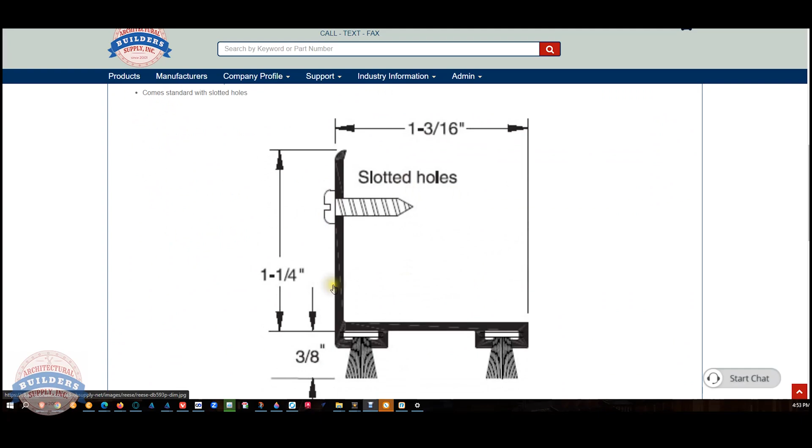Extended description information, profile of what it looks like. This is the installation instructions. It basically means measure twice and cut once. What you're going to have to do, depending on where you install it, if it's an in-swing or out-swing, you may have to notch the face of the unit.

Let's take a look at some photographs that we have of it. That's a blurry cross-section. Notching the face of the unit, if this was coming in contact with the stops on the frame, you might have to cut that back a little bit.

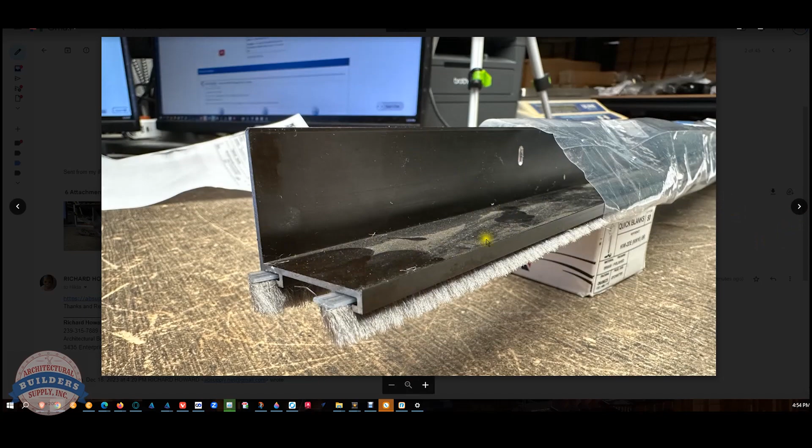Nice image showing their dark bronze. It's a warmer, lighter dark bronze than you'll see from other manufacturers. So if you're actually matching an oil rubbed bronze like a 613 finish on hardware, Reese would be what you'd want. Showing the other side, obviously some dust on that extrusion from the factory.

Showing the two pieces of pile. Now what I would do is, once I got it installed, I might punch that and crimp that slightly just to keep the insert from sliding.

I've had customers call and say, oh, it's damaged. Well, where's it damaged? Well, on the bottom. I says, do you ever see it? No. I says, do you know why it looks damaged? It's because it's been crimped or peened. Otherwise your insert's going to slide.

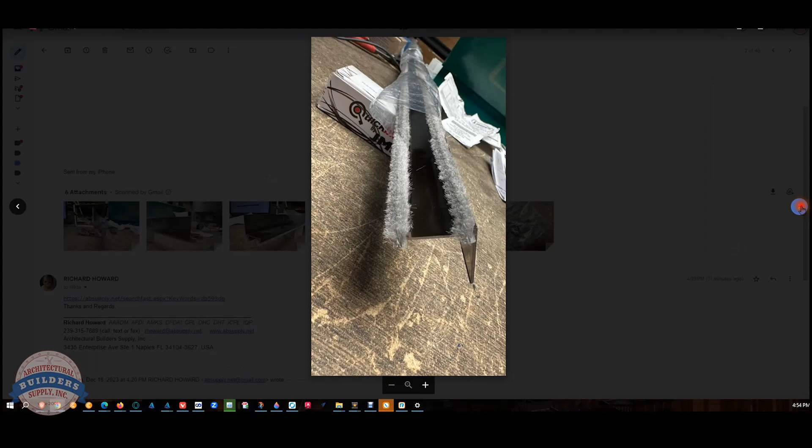The underside showing what the two rows of pile look like, and then a little better view on that. When you're replacing this material, it's the width of the rigid backer and then the projection of the pile.

Now, there is a link here to the manufacturer's page on our site where you can pull up not only all of the Reese products that we sell by means of just scrolling. There's many thousands of Reese products.

A really good way to navigate if you're not sure is just to fire up the product catalog, and we can do that here. Control F, find function for DB593, and we're going to get there.

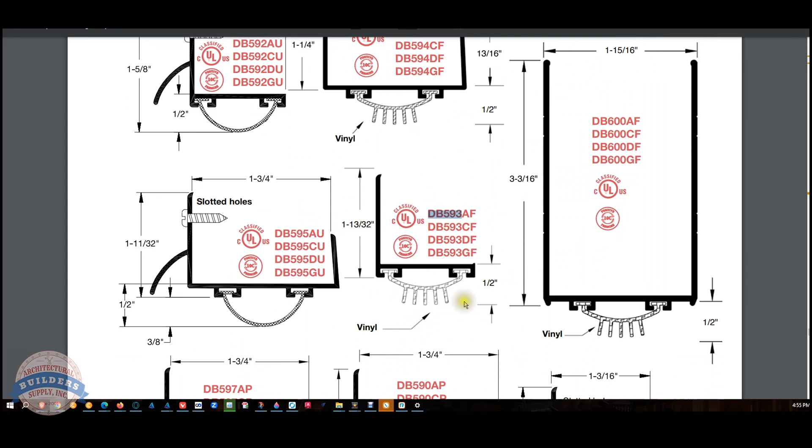Now, you see a DB593AF. This is where the customer started. Half inch, no good. Vinyl, not great to be smooth over a polished floor, which is actually what it was. But let's keep searching.

Aha, DB593 with a P. P means pile. That V, or the F, actually means vinyl that has a finger profile to it rather than smooth. This is actually not vinyl anyway.

But we can get here to see our DB593s. A, C, D, G: mill aluminum, clear anodized aluminum, dark bronze aluminum, gold anodized aluminum. And there you go. Oh, it's right here.

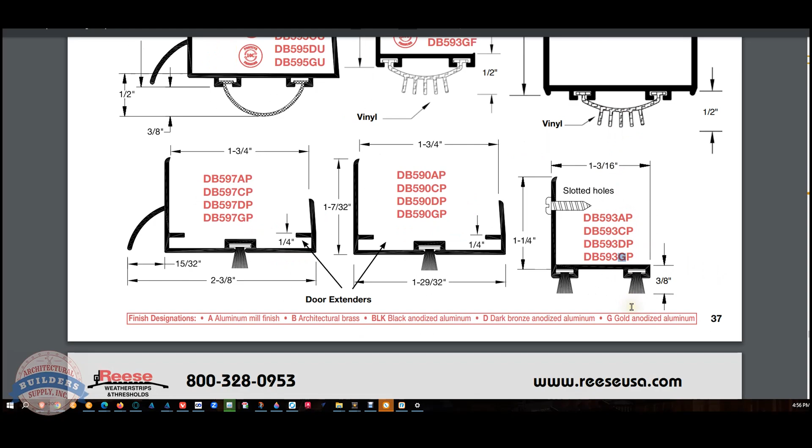Forgive me. The rest of this catalog is really nice because you'll be able to view all of the door bottom solutions from Reese. And one really nice thing to know about them is that they champion the use of polyurethane. Polyurethane is exceptionally robust when it comes to tear resistance, abrasion resistance, unaffected by ultraviolet.

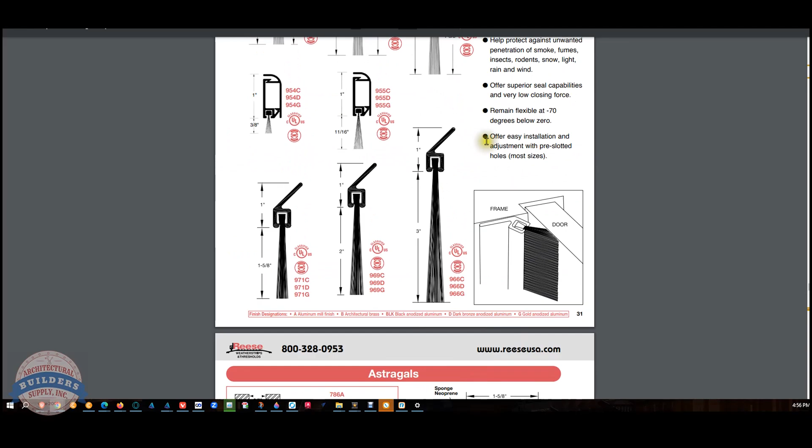So if you're looking for a product that is the most durable in many instances, like a food processing plant where mildew and fungus will not grow on it, you're going to want Reese. You're going to want their polyurethane. Abrasion resistance is off the charts.

And here's polyurethane. Let's wrap up this video on camera.

Let's move on to the rest of the video.

Okay, so that's the Reese DB593, the different finishes, the different inserts. I am an unapologetic fan of Reese, and it's because they have a very high quality product. They have a very fair price. They have exceptional technical support and customer service, and in fact that person's generally the one and the same. You don't have to get past customer service for tech support. And they have the industry's fastest shipping times of any manufacturer of weather stripping, period.

As long as you get over their factory minimum, they will drop ship quicker than anyone else. Their extrusions are usually thicker, so it'll feel heavier. And they've got that polyurethane. They've got STC rated material, which you can look at in the catalog.

And while they don't have the most pages in a catalog, they sure have all the basics covered very, very well. And they do some thermal break material. They also do hardware compatible material. They're also going to allow you interlocking weather stripping, which a lot of people don't use.

So take a look at their catalog. Any questions on the DB593 or any other Reese product, please feel free to reach out to us. And thank you.